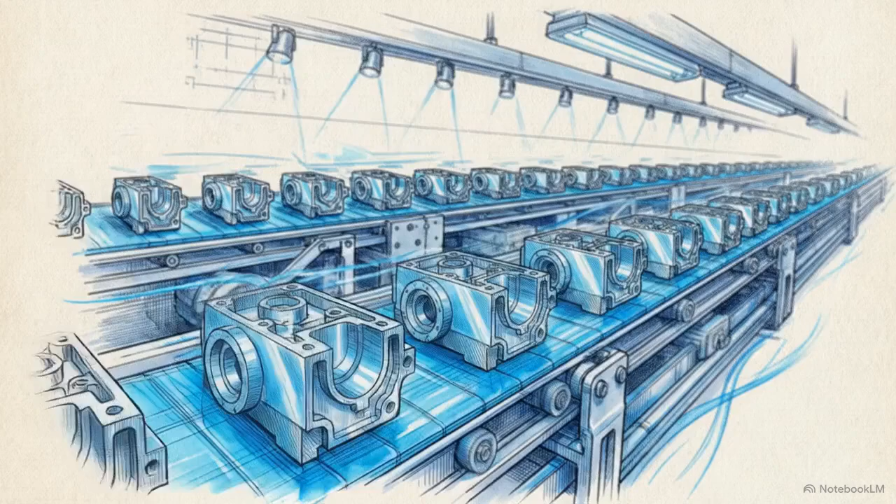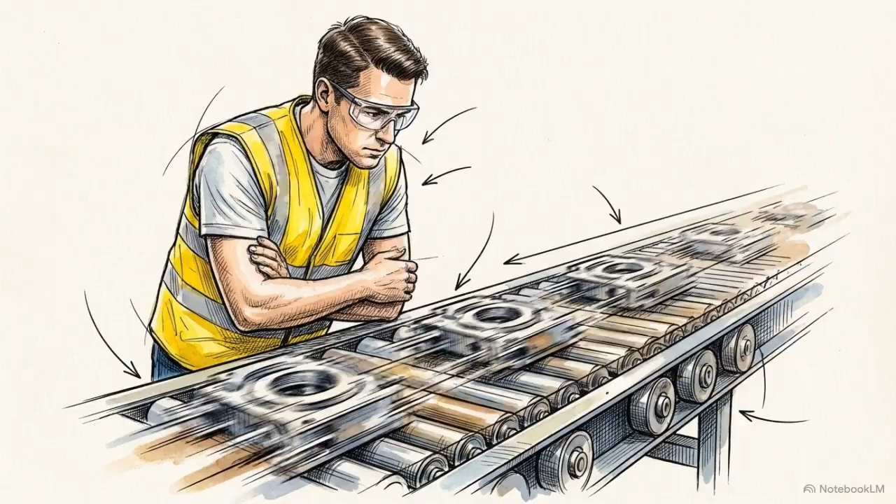Imagine a factory floor manufacturing safety-critical components for electric vehicles. Every hour, thousands of identical parts move down the line, sliding past at breakneck speed, all watched by a single human inspector. That inspector must spot a crack thinner than a human hair without slowing production.

For the first hour, concentration is sharp. But after inspecting several thousand identical parts, fatigue begins. One tiny flaw slips by. In manufacturing, this is a quality escape, and months later, that defective component causes a serious failure.

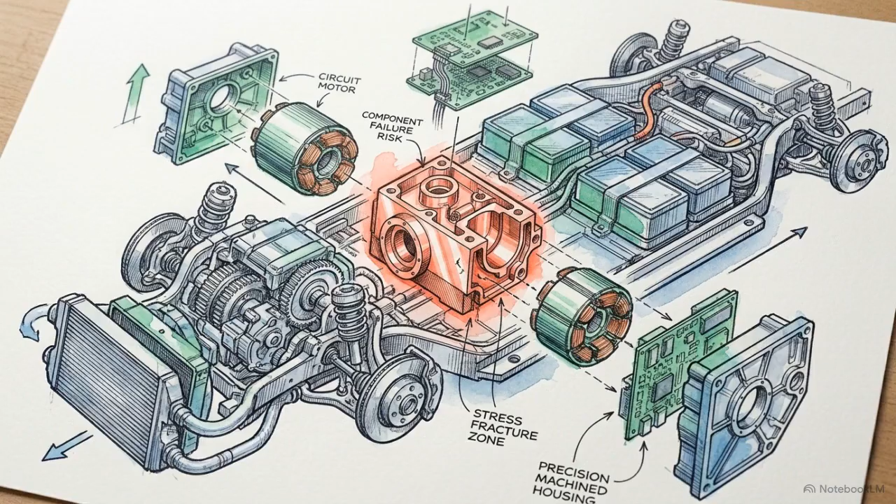Traditional machine vision systems use rigid, manually programmed rules to try and catch these errors, but they struggle with natural variation. If a piece of wood has a different grain, or a weld looks slightly different depending on the camera angle, these inflexible algorithms often reject perfectly healthy products.

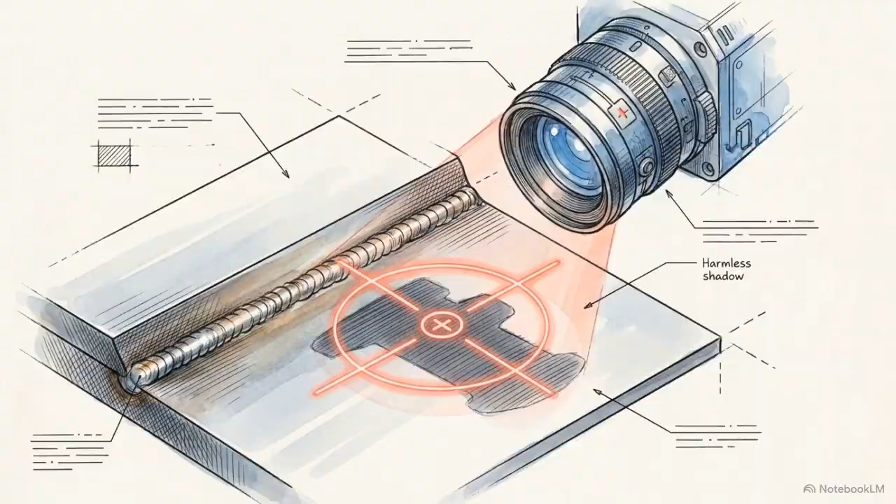This forces manufacturers into a difficult choice. They must either rely on the limited stamina of human eyesight or trust code that cannot distinguish a harmless surface mark from a dangerous defect.

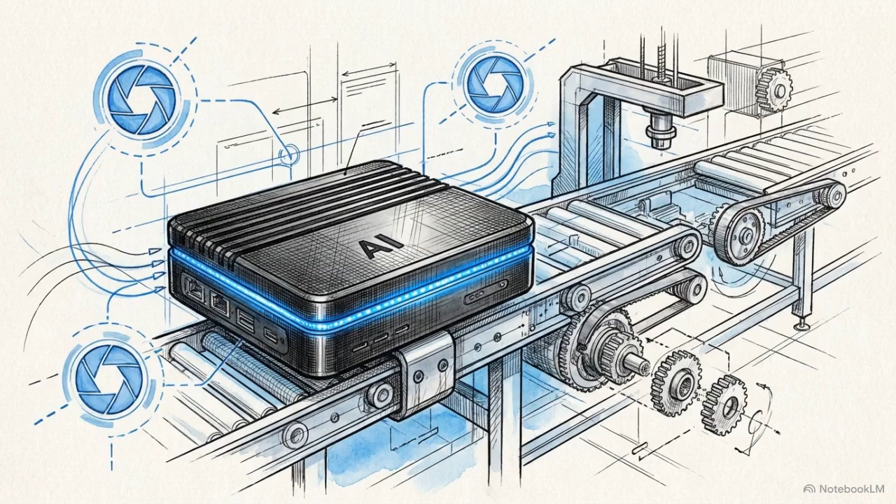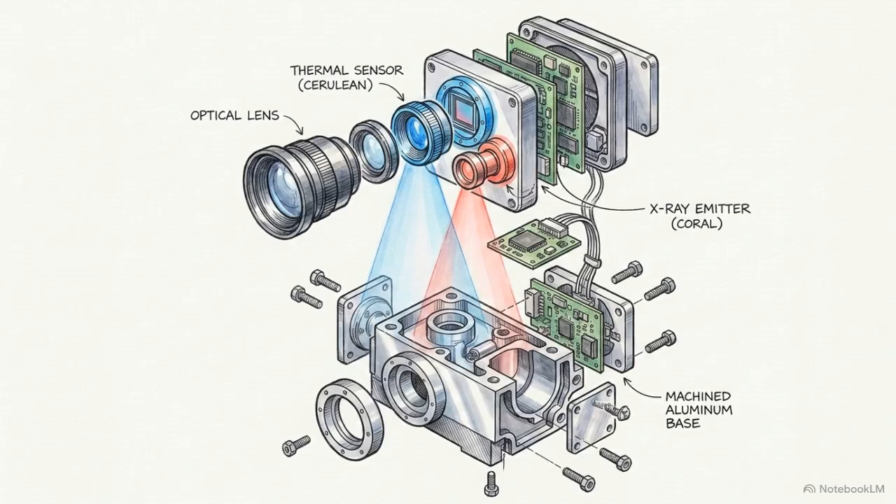Today, modern artificial intelligence offers an alternative. These models learn broader visual patterns from examples rather than following a list of mathematical rules. This creates a more comprehensive perception engine.

Through multimodal sensor fusion, the AI stacks standard camera images with X-rays and thermal heat patterns. Analyzing these overlapping layers simultaneously, the system identifies microscopic stress fractures deep inside the component's geometry without ever fatiguing.

Global institutions are already tracking the scale of this adoption. In early 2026, the World Economic Forum reported that initiatives from manufacturers like Siemens have successfully scaled AI inspection across factory stations, demonstrating measurable economic value through improved yield.

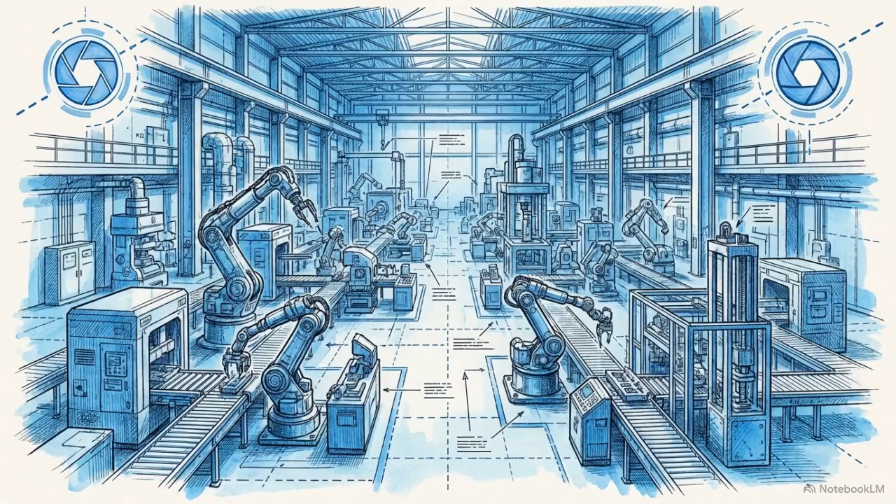The speed of these systems creates an alluring but dangerous assumption that a factory equipped with AI can run perfectly with no human oversight at all. In practice, artificial intelligence is entirely context-blind. Its performance is fragile, tethered strictly to the stability of its physical environment.

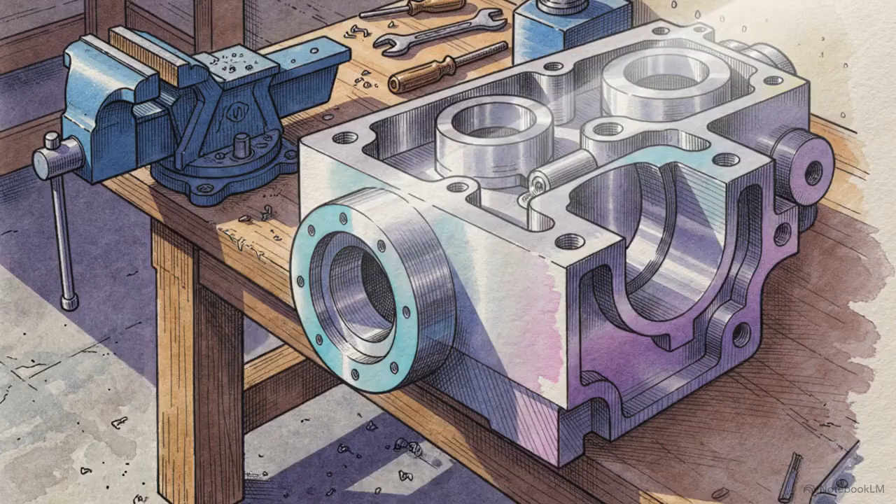Consider how the sun shifts across a factory floor during a shift. This changing ambient light alters the glare on a metallic surface. To the AI, the underlying pixel data has transformed. A dimming light bulb, dust accumulating on the lens, or a vibrating camera mount can break the system's ability to recognize what it's looking at.

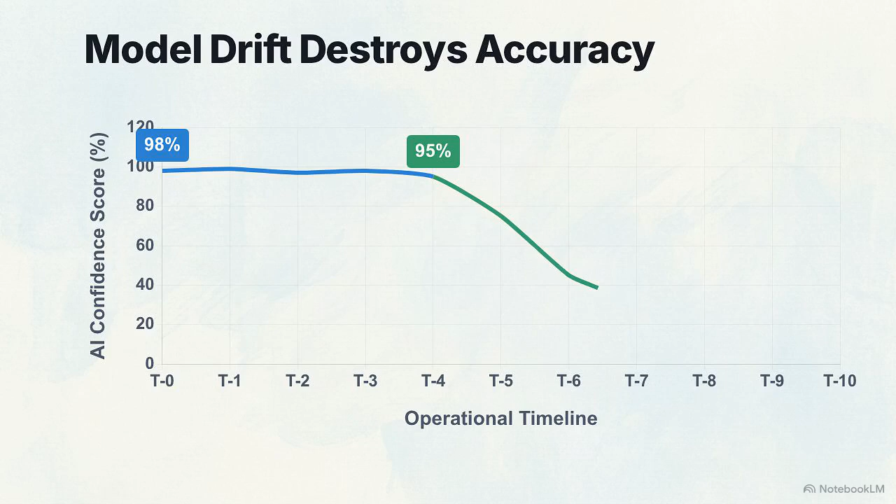This is model drift. The system can also fall victim to shortcut learning. If every defective part in the training data was photographed against a specific background, the model might learn to recognize that background rather than the actual defect on the part.

This fragility leads to two distinct failures. The system either creates massive waste by rejecting healthy products, or it creates a safety risk by approving dangerous ones.

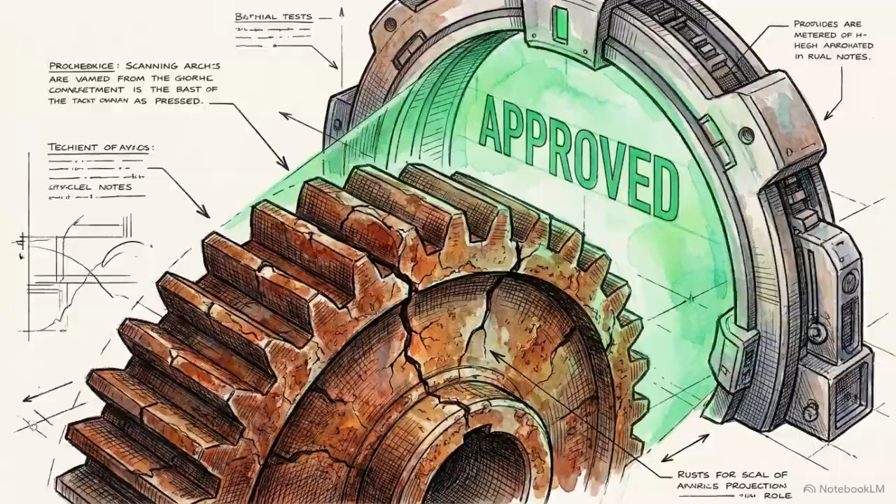Placing a seemingly infallible machine in front of people introduces a psychological risk called automation bias. When an AI dashboard consistently displays a 99% safety score, human operators often begin to trust the screen more than their own eyes, eventually abandoning their critical oversight.

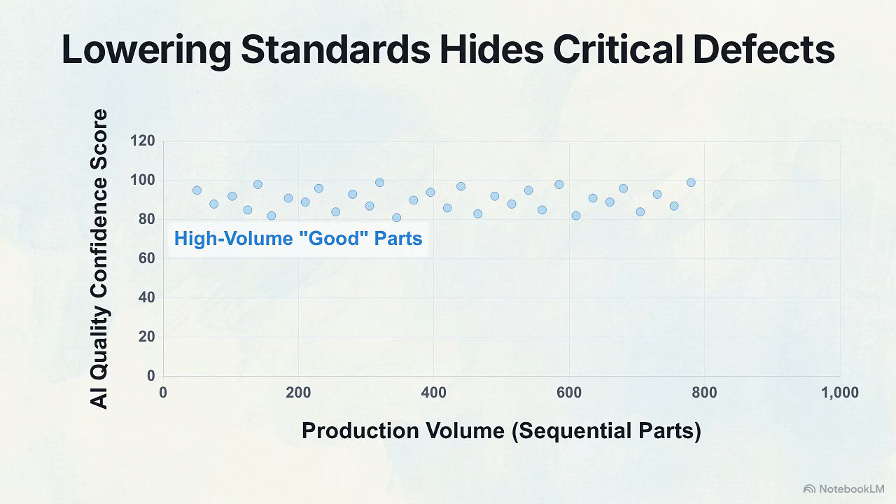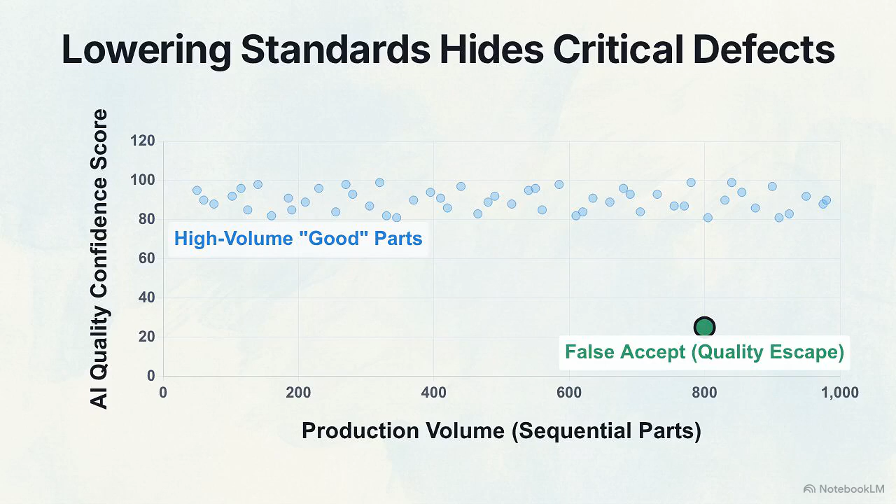This is the base rate problem. In high-volume environments, algorithms designed to keep production moving can hide rare, highly dangerous defects. If a manager lowers the threshold to improve metrics, the dashboard shows perfect success, while unidentified cracks ship to the real world. Removing human judgment transforms the factory into a darker system, one that optimizes for dashboard metrics instead of real-world product safety.

AI provides the most value when used as an investigative tool to prevent defects, rather than a final sorting mechanism at the end of the conveyor.

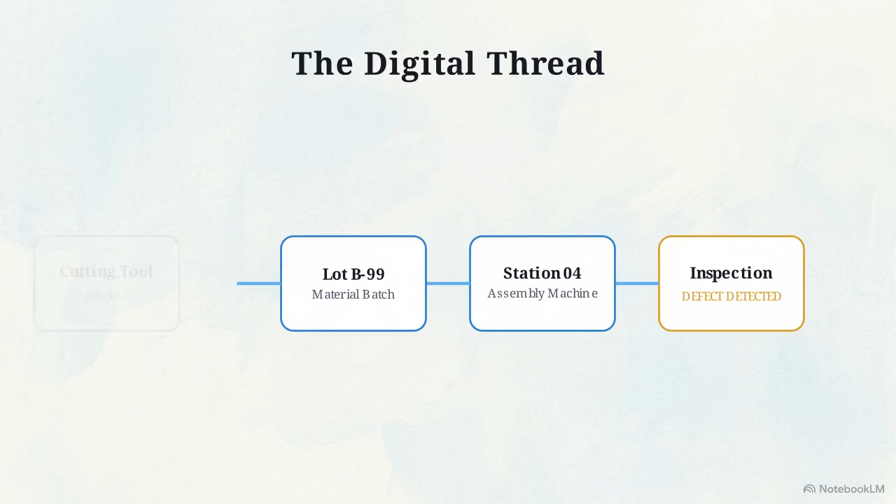This is the digital thread. Identifying a defect links it backward through production history, tracing to a specific machine, material batch, and cutting tool. Engineers see the tool deteriorating after 8,000 cycles, pausing production before another defective part is created.

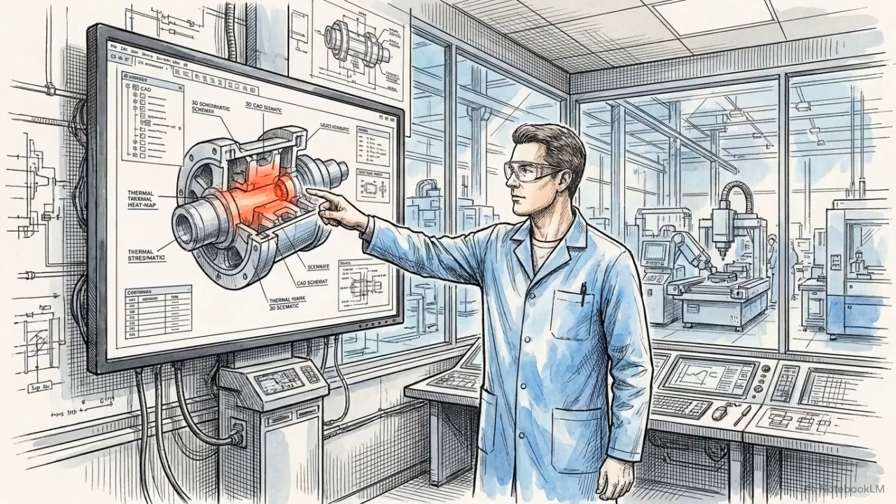This level of process control requires extreme data accuracy. Federal research institutions like NIST are actively validating these complex three-dimensional vision systems to ensure their measurements are reliable enough for safety-critical decisions. Intelligent quality control targets the origin of the error, allowing engineers to anticipate and prevent defects before they reach the customer.

Beyond total automation lies the gray zone, a collaborative approach where AI flags ambiguity and humans provide the final word. In this scenario, a robotic assembly line halts and a red laser brackets an ambiguous mark on a part.

The most trustworthy systems use three outputs: accept, reject, and review. Instead of forcing a guess, the AI explicitly admits when it is uncertain. Human quality professionals then use the AI's data as evidence, applying their own engineering judgment to the anomaly.

The factory of the future requires AI for machine-scale perception, but it relies on humans for accountability. True quality is defined by real-world safety, not just what a camera sees.